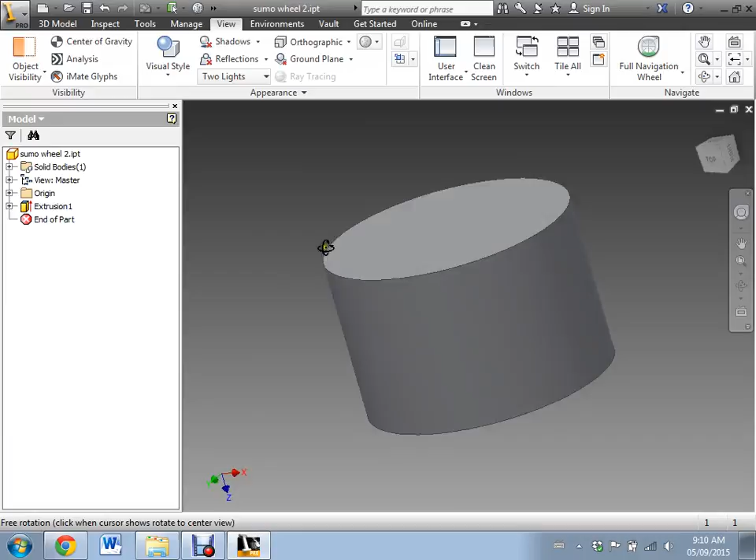So I basically started with a cylinder here. You can see it, and if I hold the shift key down, I can rotate, and the center mouse button I can rotate around. Okay, and what I want to do is add an axle, and you can see I'm on the back here, so I know that this is the back, and I'm going to click on it and highlight it in blue.

Now what I'm going to do is add the part in. So I'm going to go back to the 3D model, click on our sketch, and zoom in really quite close because the part I'm going to do is quite small. You can see I've got all my drawing tools, and I'm going to go to polygon, and under polygon I'm going to put an 8-sided polygon.

What I want to do is match up to the axle that your gearbox, that you're going to eventually get, is going to do. So again, I click on the center, I click - oops, I got to click on here, and when I click on it, it's kind of up there. Why is it disappearing on me? So let's just zoom out a tiny bit, and there we go. For some reason it just zoomed on me.

So I've actually clicked this one here, which is circumscribe, and what it does is lets me go on the axes. So I'm going to just do this and click anywhere.

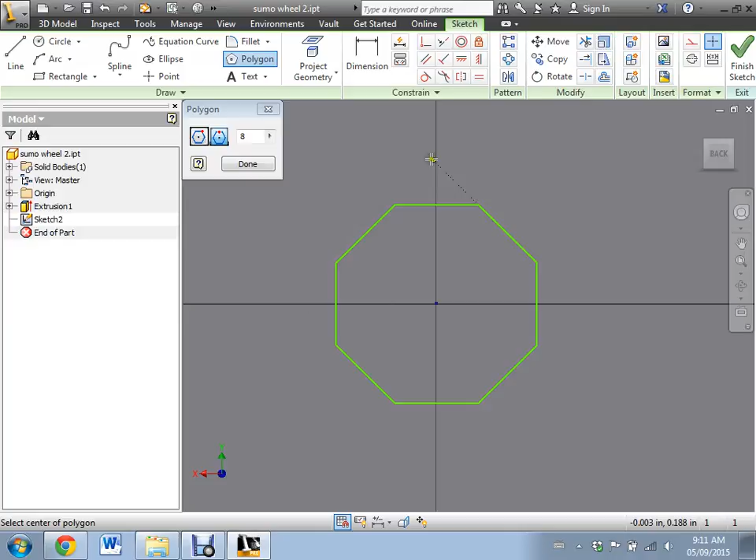There's my part, click done, and again in Autodesk Inventor what I want to do is actually dimension it. So I'm going to dimension it right away, and I know that the distance from here - if I do that, it dimensions one thing, but if I go across and touch the next one, it'll dimension across it. Put this dimension down here, and I know that this number here is 0.11 of an inch.

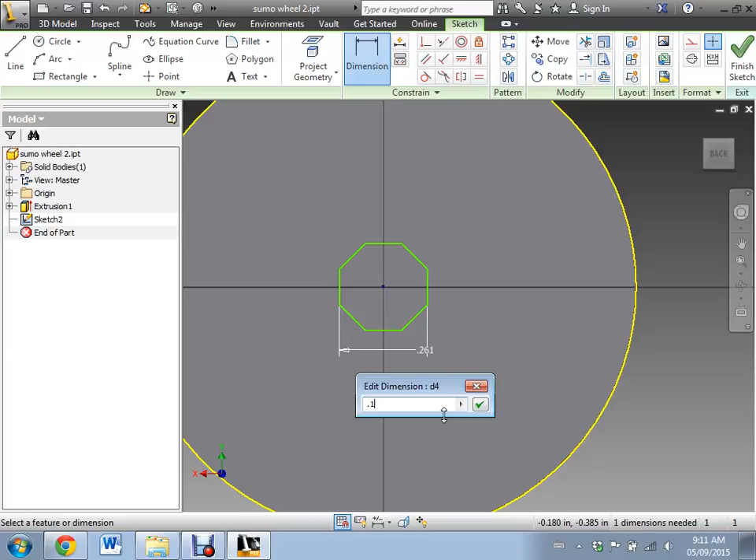You can see how small it gets. Okay, so that is now my axle hole, and I better have done that right for you. And then I just click Finish Sketch. Okay, so there's my axle hole now.

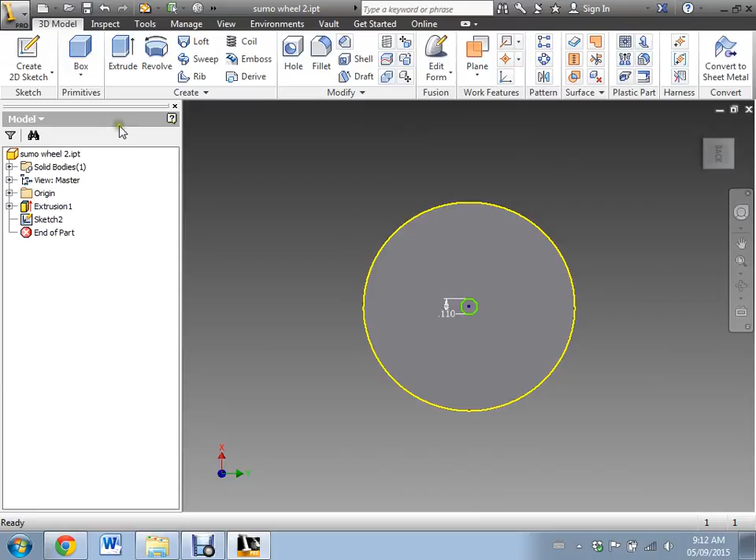And I'm going to shift and drag it, and this you can see is the back, right, because it's the back of the wheel. And I'm now going to basically extrude it. So I'm going to click extrude, and you can see what happens here.

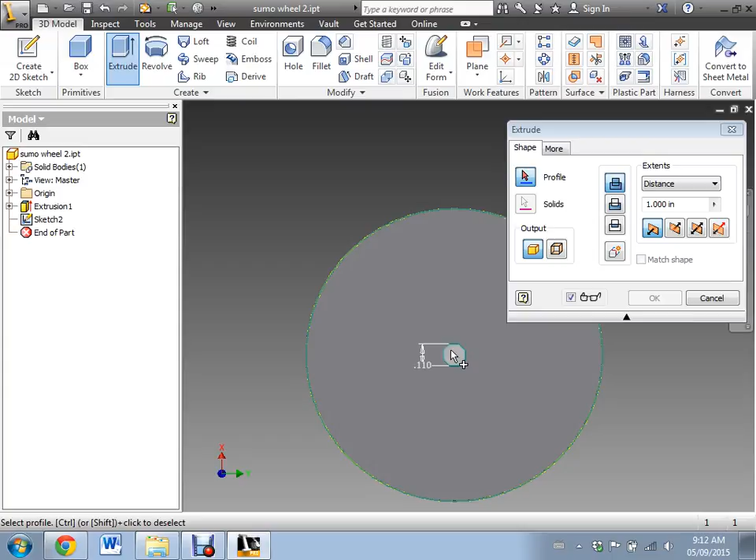I'm going to zoom in. You can see that it's grayed there and it's grayed there now, and what's happening is Autodesk Inventor is saying, do you want to extrude based off of this, or do you want to extrude based off of the whole inside? I want to do the inside, so I click on it so it's gray here, and then now you can see when I hold the shift key down, there's my extrude.

Now I can take this, again, the arrow, go in and out, right? What am I doing here? If I hold this here, am I going to remove material, right? Cut, or am I going to join? I want to cut material, and so I'm going to take this and just drag it in.

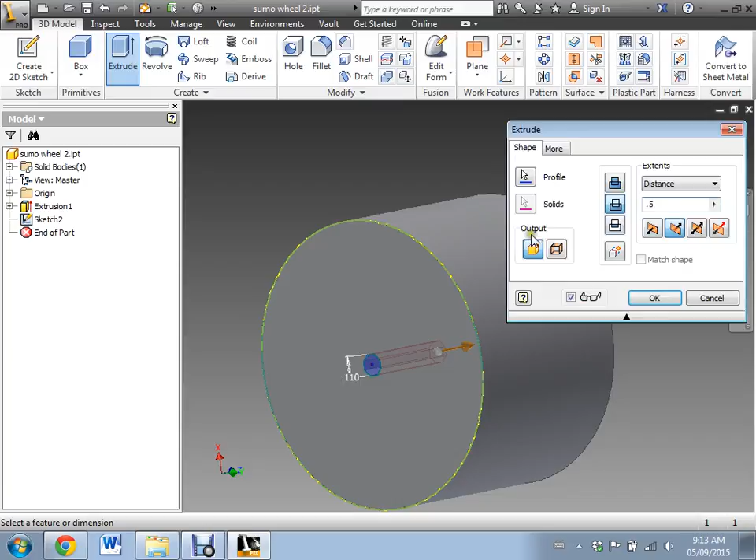You can see now there's a hole being created. How deep am I going? I don't know, let's go 0.5 of an inch in, to make it a set distance. And again, do I want it - yeah, I want it this time direction 2. I don't want it symmetrical or anything. Okay, so that's kind of how we do that. And click on OK, and there's my hole.

Now, how deep did I really go in relation to the whole thing? You can't really tell. So sometimes you can just come up to View, and you go again to Visual Style, and you go to Wireframe. Okay, and now you can actually see the thing inside there, right? Okay, so there it is.

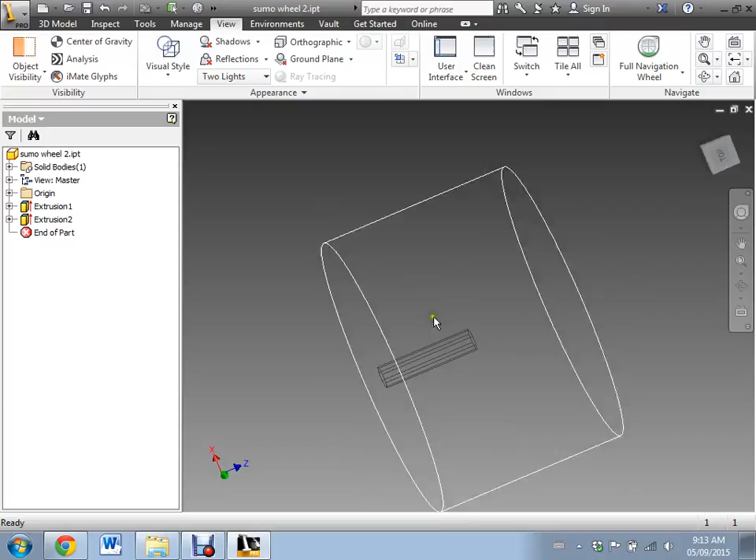Now, what's going to happen is you're going to start getting different extrudes and things happening, 1, 2, 3, and you can click on them, you can highlight them, see what happens here. And I'm just going to go back to shaded because I personally like it. And I'm going to actually rename these. So this, I'm just going to double click, and I'm going to call this one the outside diameter.

And the next one here, I'm just going to double click, and I'm going to call it the axle hole. This way it just kind of helps you name parts so you know what each part is quickly for reference, because later on you actually start moving things around and they change orders, and it might mess you up a bit.

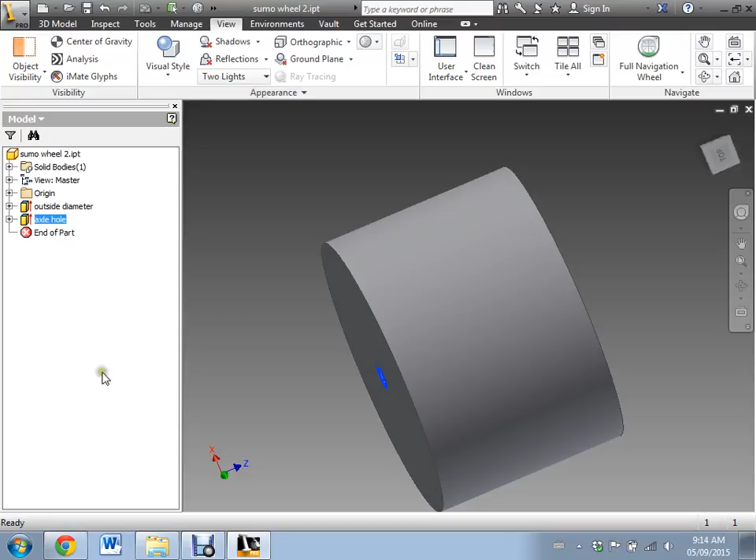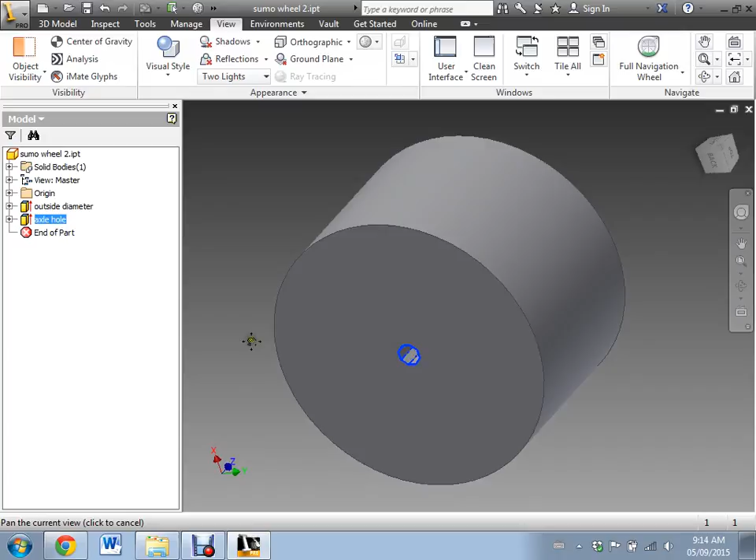So there's that, I've got my kind of things set there. If I want to go in and edit the axle hole, obviously I can just come up here and double click and go, no, I really wanted it 0.4 deep, right? And then I just hit OK, and it would actually change it. Okay, and you can again click on it, you can see, highlight, you can see stuff. So I'm going to stop at this one.

That is a very short tutorial, and we'll go into tutorial 3 where we're going to start cutting different things out of this wheel some more. And that concludes tutorial 2.